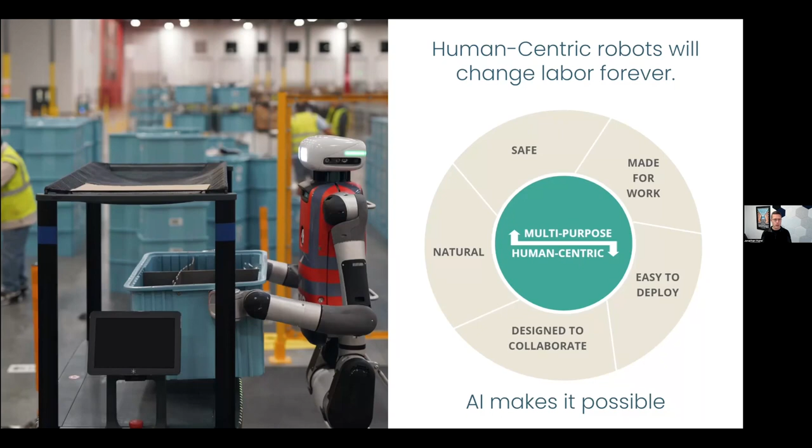Another point I'll make at the start of the talk is that we're really in a third revolution in robotics. The first one I'd identify starting in the 60s with the very first manufacturing robot, the very first robot that was commercially deployed. These were big robot arms bolted to the floor, doing pick and place—pick something up in its workspace, set it down, welding, painting, that kind of thing.

And that market continues to grow. That's great, but that started a long time ago. Then maybe in the 2000s, we started to see autonomous mobile robots.

Now there's things that are rolling around and doing things, but still the whole environment, the whole space is designed for the robots. You have to really modify your environment so that the robots can operate in the warehouse, in the location where these mobile robots operate. But now what's happening is we're able to have robots exist in our space. We're able to have robots that are human-centric.

And because so many tasks are designed and built around us, that is a huge opportunity for being multi-purpose. Now that these robots operate in our space and can do the workflows that many people can, and there's so many different tasks and workflows designed around people, Digit can be multi-purpose. That's pretty exciting, and that's part of this whole new era.

We still have very nice cameras for photography that specialty photographers use when you really need top image quality. But the vast majority of photos taken in the world are on a smartphone. And a smartphone, of course, is multi-purpose.

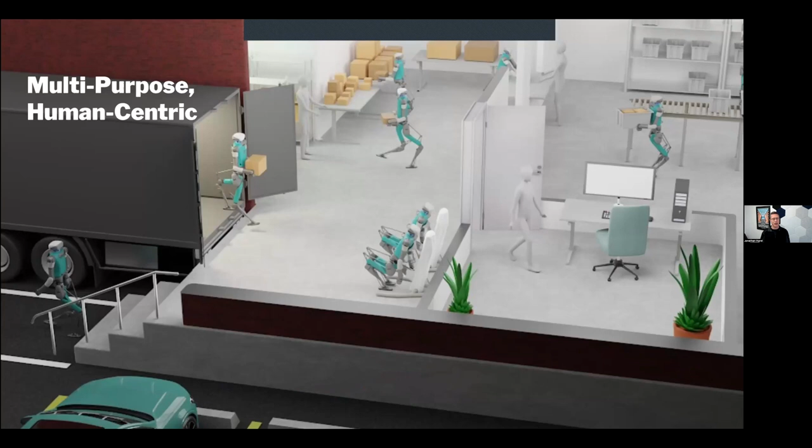Now, what we're talking about with robots is a machine where it's like the App Store, but for labor, but for doing the physical things in the world. And so having one robot that can do, say, unload a tractor trailer, like in this image, and then head down those stairs off to go deliver packages out of an autonomous vehicle, and then be sorting totes on those bins, and then also be interacting with a person.

This is in a human space, in a human environment. The robots can come in and just start to do all this stuff. That's when these start to become part of daily life, start to become very, very common, and really, really become useful.

So what does it take to get there? Okay, it's an exciting vision. We've wanted this for hundreds of years as humans.

First, I would say it starts with the hardware. The software is limited by the hardware. The hardware is the interface between the AI and the world. An AI is a brain in a box until you've got hardware that can actually physically interact with the world. And it isn't as easy as making something that looks like a person and putting motors on the joints. It's also moving like a person and getting true dexterity, which is really a holistic combination of the physical hardware and the software that's controlling it.

And then another thing that I think a lot of people, especially in academia, may overlook is the commercial engagement. It's an absolutely necessary piece of this in order to have a use case, an important, valuable application that has metrics and requirements to it.

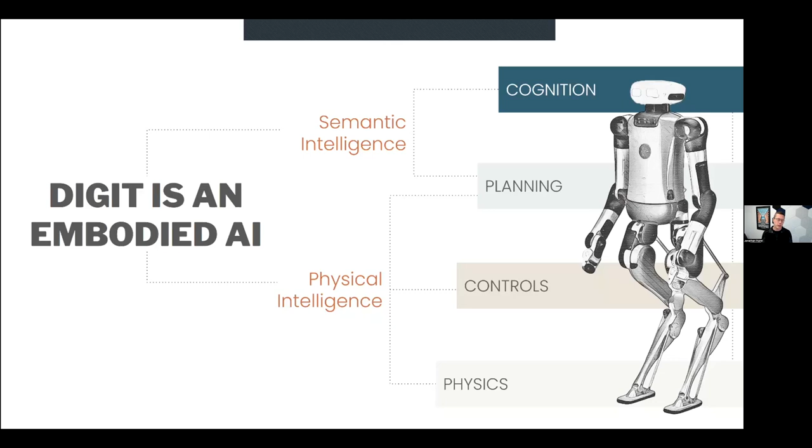And really, that's kind of like, what can the robot do? Can it handle stairs? Can it pick up a cup? Can it open a door? What kind of dexterity does it have? Can it go down a hallway? What can a robot do, as the physical intelligence?

But then on top of that is the semantic intelligence. That's what everybody's getting so excited about right now with large language models and chatbots and so on, is what should the robot do? And honestly, a couple of years ago, if you'd asked me, I would have said Agility is founding everything on the physical intelligence. It's going to take decades of having robots in the physical world to build up our semantic intelligence. But it turns out if you just scrape the internet for all of its information and put it in a giant large language model, you end up with that human context, kind of the instruction set.

So you can say, hey Digit, clean up this mess. I'll show you a video of that. And then Digit knows what to do and can break that down into a set of instructions that then the physical intelligence part of the stack can actually execute on.

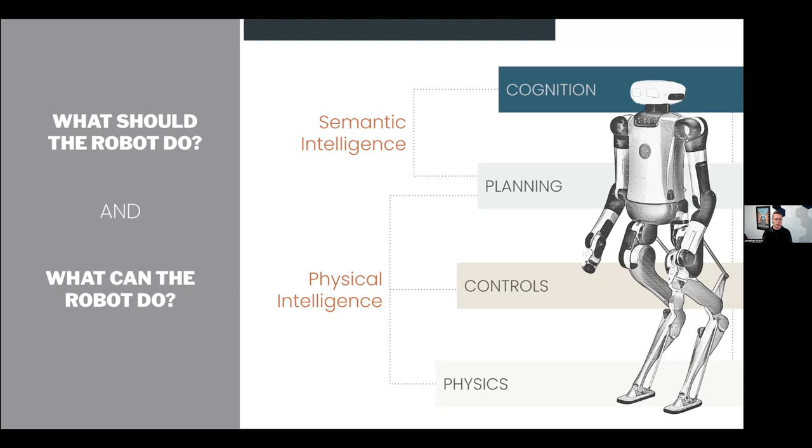Okay, so starting at the bottom of the stack, the physics. Physics really matter a lot. When we talk about locomotion, the thing we started with was understanding biomechanics. And I don't care about where individual muscles are, whether there's a knee joint, or the heel toe—the details of the morphology were not the thing that we really looked at.

We looked instead at what are the ground reaction forces. When the foot is on the ground, you can measure the forces on the ground. What's the center of mass motion? And then what is the basic behavior divorced from the implementation details of an animal? Because we're building machines. We don't have muscle and bone. We have aluminum and electric motors and computers.

So, first understand biomechanics. And this applies to manipulation as well, and studying how people grasp things. And I might make this point a few times, but the morphology or the shape of the machine is really just the tip of the iceberg. It's like one symptom, one small piece, and not even necessarily the most important piece.

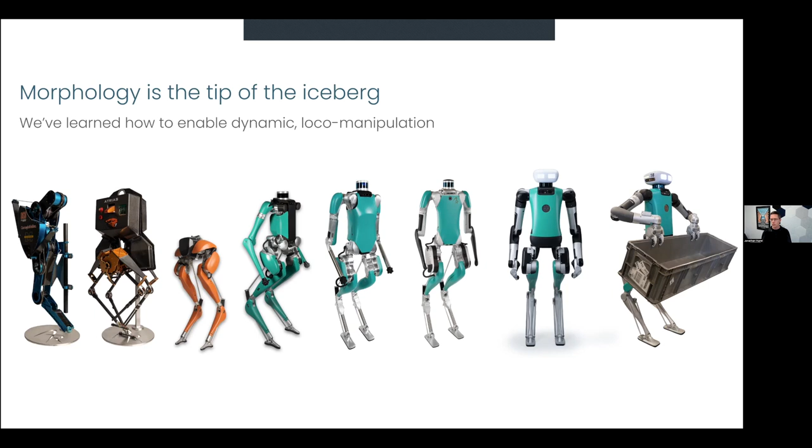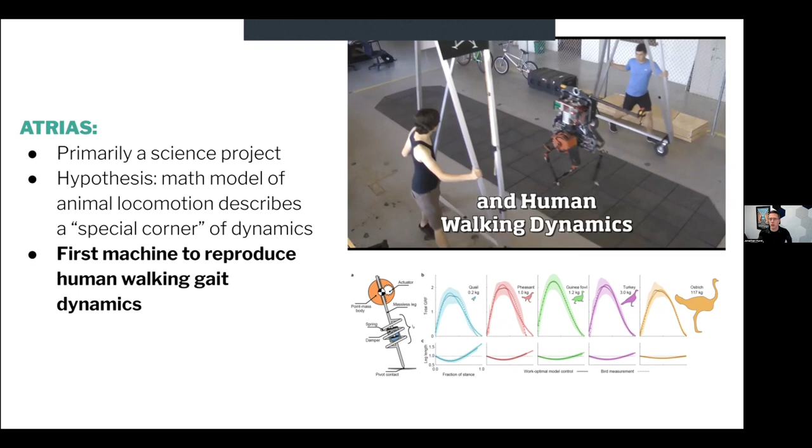So we wanted to make sure we aren't getting some nuance of a particular specific animal or specific bird. We wanted to understand what is true across all animals, all bipedal locomotion, and then make sure we captured that into a machine. And this hypothesis is that this math model that did represent how animals really describes this special corner of dynamics, this self-stable behavior of locomotion. And ATRIAS ultimately was the very first machine ever to reproduce the dynamics of a human walking gait.

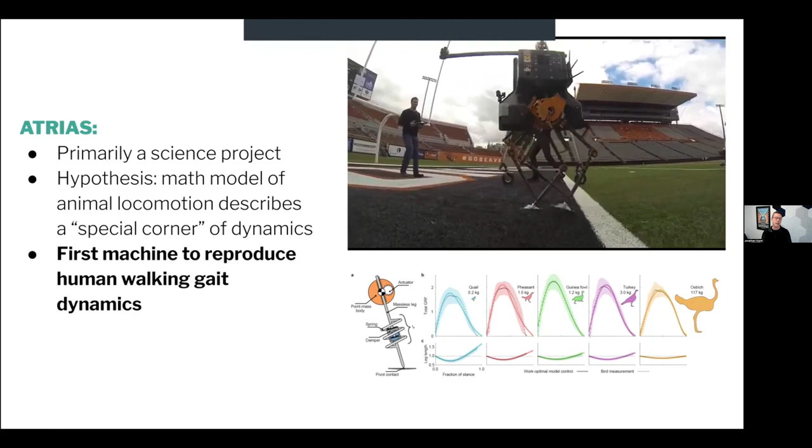A little bit into this video, you can see that. Here you can probably see that it's walking and running, and you can see, of course, the morphology, the shape of it is this 4-bar linkage, nothing like a person. But here, the walking dynamics—look at the ground reaction forces. On the left is the robot. Let me pause that there. On the left is the robot, and on the right was the person. And you can see they're awfully close.

So this is one symptom, one thing that shows us that we're capturing the right physics of locomotion. The other is, hey, it's walking and running outdoors over all kinds of terrain. It's totally blind. There's no planning. There's no camera. There's no perception. Yet we can go over all of this terrain. So there is this special corner, this self-stability that we're getting by capturing the right physics of locomotion.

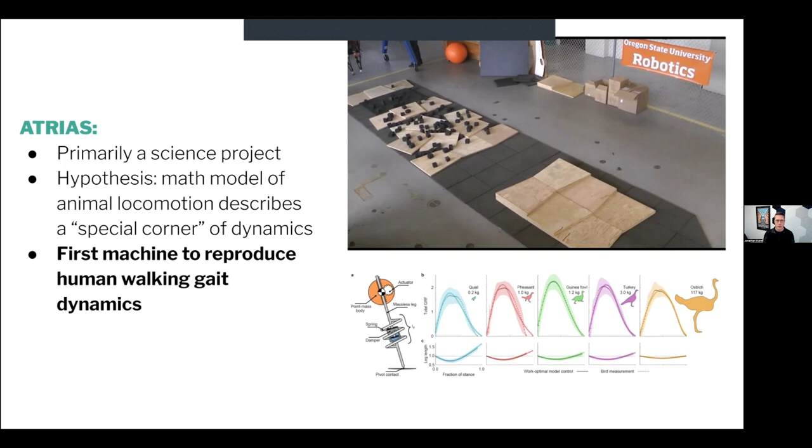Okay, so these are the foundations. And I want to point out, the hardware, the physical, mechanical pieces of the robot, they have to be special. You can't just put the motors on the joints. You see how this robot is moving organically. It's not moving robotically. This is not a position control trajectory. It is not a position trajectory.

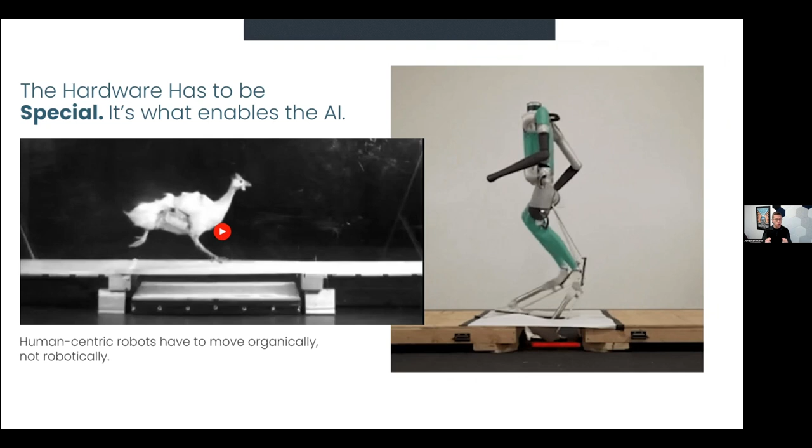It is much more about forces that we're applying on the world. And so we need special actuators that are actually controlling the force and able to control the force at a high rate. It's about impedance and compliance and flexibility when it makes unexpected contact with the world. They have to move organically, not robotically. Only if you have your hardware foundation and your physics integrated in that way can you hope to then learn how to do natural walking and running gaits. And again, this applies to locomotion or manipulation. I don't think there are that many differences between locomotion and manipulation. I think of it all as one kind of loco manipulation challenge.

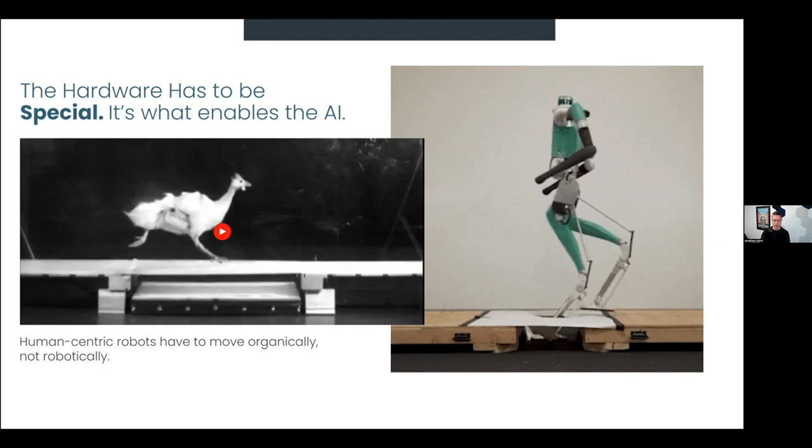So the hardware physics, when you're designing a robot, that's not something that you can learn. You can't have a computer just use a machine learning algorithm and spit out a design yet, maybe in 20 years or 100 years, sometime in the future. But today that's engineered. That's engineers who understand the physics and understand what they're trying to achieve, and can work with various vendors and manufacturing processes to create the machine that you want.

But then, kind of the next layer up, the controls, that can be heuristics and model predictive control and things where engineers are writing down the equation, the solution. And it can include learned approaches, reinforcement learning and other approaches. All of those things are really applicable in different ways for controls.

But one thing that's true is that all of this must be explored in simulation. So the physical intelligence of this is not something that can be data-driven. You'll see a lot of people talk about using teleoperation to control these things, and you learn from teleop in order to have a machine do useful things in the world. I don't believe that fundamentally can work.

I feel that you can sometimes, and we have seen examples and demonstrations of people, after teleoperating a humanoid robot, then the robot can reproduce that task, but it's extremely brittle. It is very, very brittle, and only in the very specific scenario within the constraints that the data was taken can it operate. It isn't generalizable. It isn't stable the way that we showed that locomotion over all kinds of terrains.

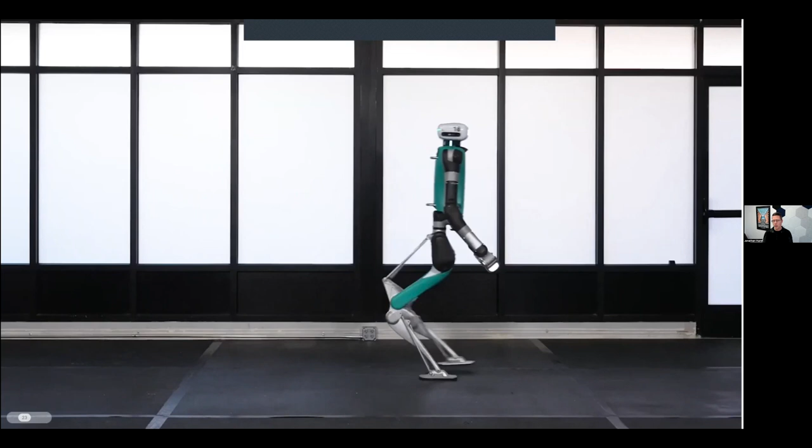And then we get to the sim to real transfer video. Here it is in simulation. And here it is on the robot doing the exact same behavior. Sim to real works if you've got the hardware, you understand the physics of your hardware, and it's clean enough that you can simulate it.

All right. So let's see.

Same video as before, but the point I want to make is that this success of going from simulation to real depends on having robust physical intelligence, because you can get brittle solutions in simulation. So in your simulation you have to have inaccuracies, noise, and all of the stochasticity you're likely to see in the real world if you want the robot to be robust to that as well.

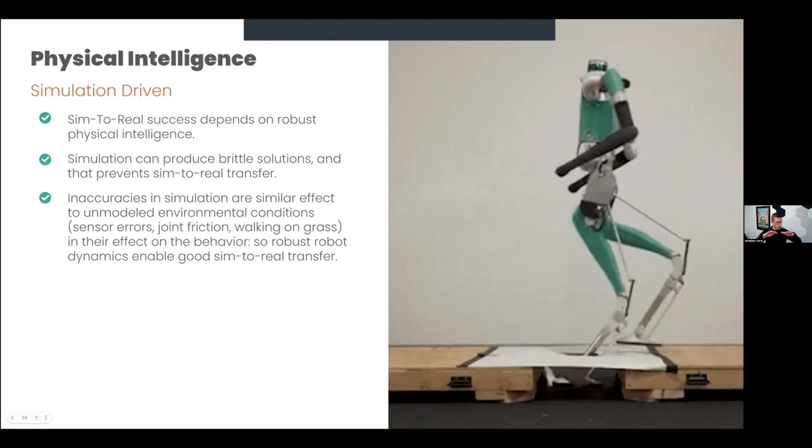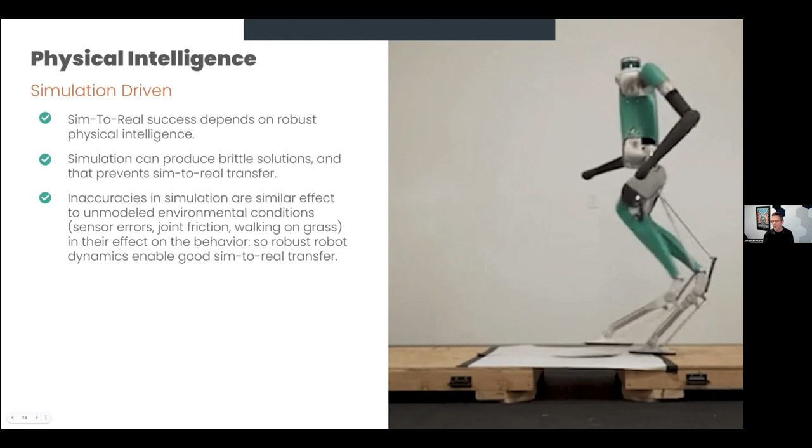A story to tell: when we first took Cassie, our bipedal robot, and had it run a 5K on a learned policy, it worked great on our treadmill in the lab. When we took it outside, a very slight sideways slant—the road had a slight crown so water can drain off, less than 1 degree—was enough to totally destabilize the robot. It would just fall off to one side or the other. We had to go back and spend another few months training on all kinds of different non-flat surfaces to get this thing to actually be robust outside.

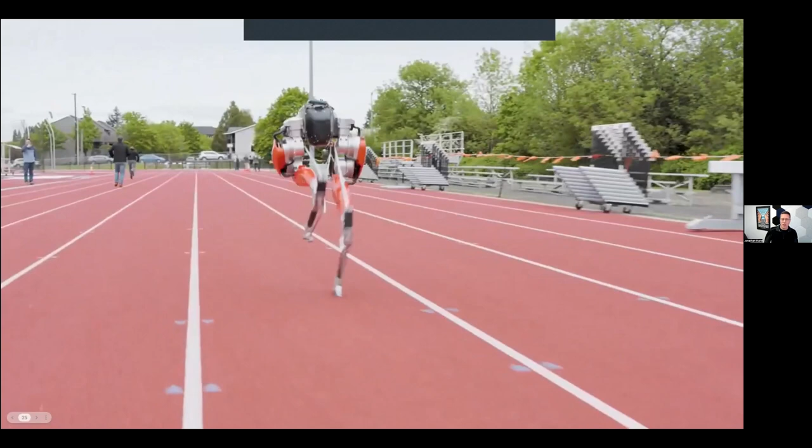And here it is. This is Cassie now running a 100-meter dash, all using reinforcement learning to create this behavior. First off, the robot has to be capable of impacting the ground over and over with compliant, impedance control. But exploring this behavior in a learning environment and simulation is the only way to get such a beautifully natural gait. This is not constrained by some oversimplified model.

This is not a linear inverted pendulum model. This is not zero moment point. This is bouncing along—very much spring mass locomotion, but with crazy inertial distribution in the legs that make it a real bear to try to control using any other method. So I'm very excited about these kinds of approaches.

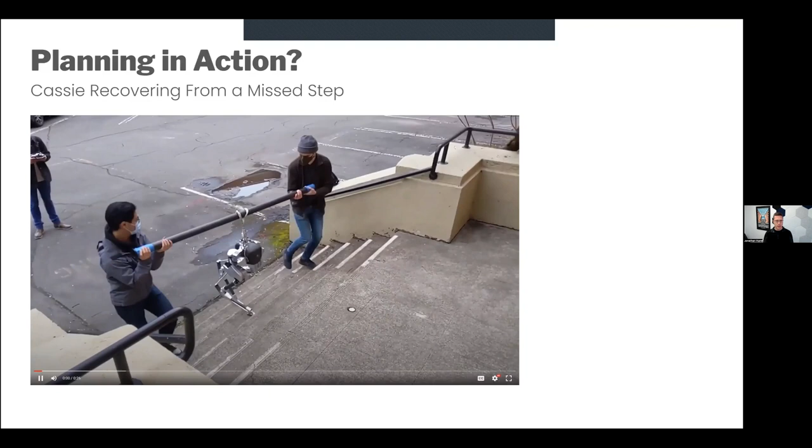All right, here too—this isn't brand new. You can see Cassie steps right on the edge of the stair and is able to recover. Here it is in slow motion: you can see its toe is caught right on the very front edge of the stair, and yet it steps backward and forward. That's because this is the stair climbing policy.

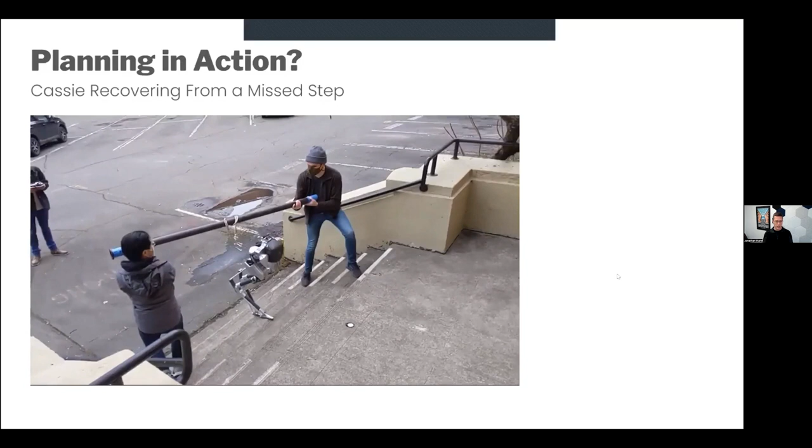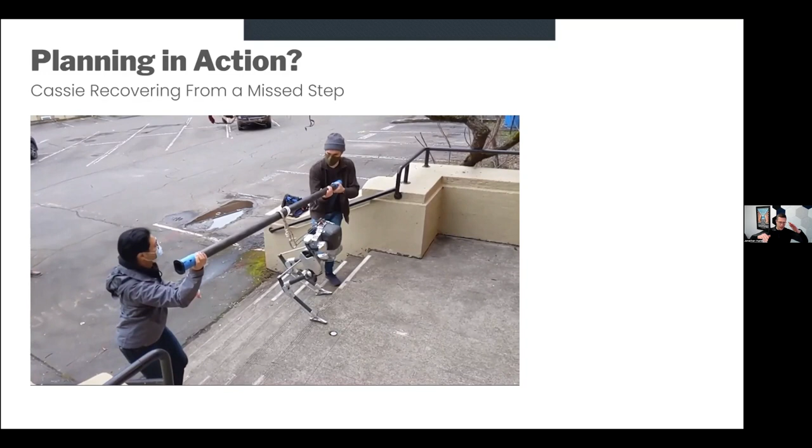It saw tens of thousands of stairs in simulation. So even with no cameras, it's able to create a gait where it's stepping high, and it will be able to recover even if it steps on something it doesn't expect. Step up, step down—it doesn't need to know.

Now, if you add some perception to that, you get stronger behavior. So this is Cassie—it does have a camera on the front of it, and it's creating a depth map of its environment, so it's able to interpret something.

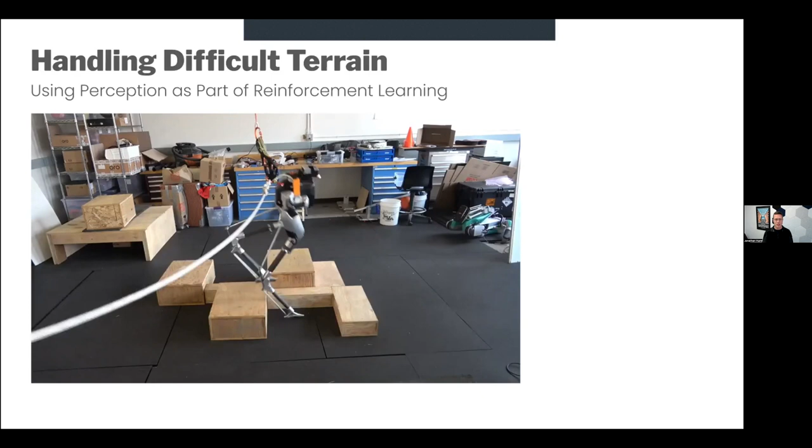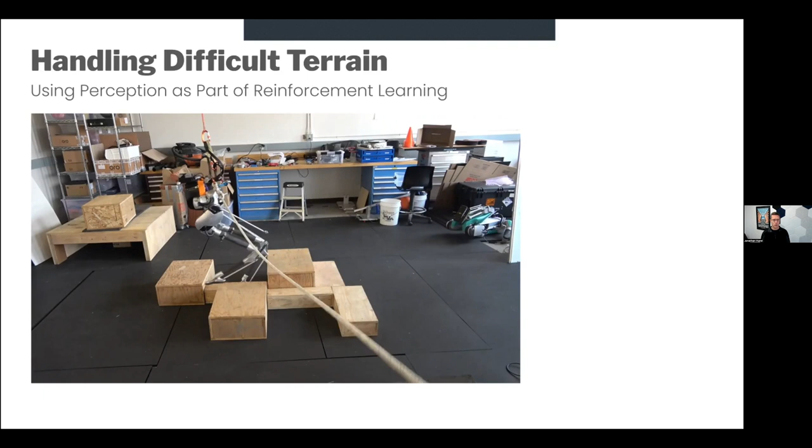That depth map, of course, is kind of noisy, so it's important to have the robustness you saw before, with locomotion that's completely blind as a backup. But you can also see it taking small steps on flat ground, and it sees when something is coming up and steps up pretty high. Sometimes it misses the step—it steps high before the step comes, or steps off the edge of something unexpectedly. Just like a person, it can be a surprise, but the robot can handle it. That's the benefit of having this hierarchy of layers: a robust gait that works while blind, then adding information with perception on board.

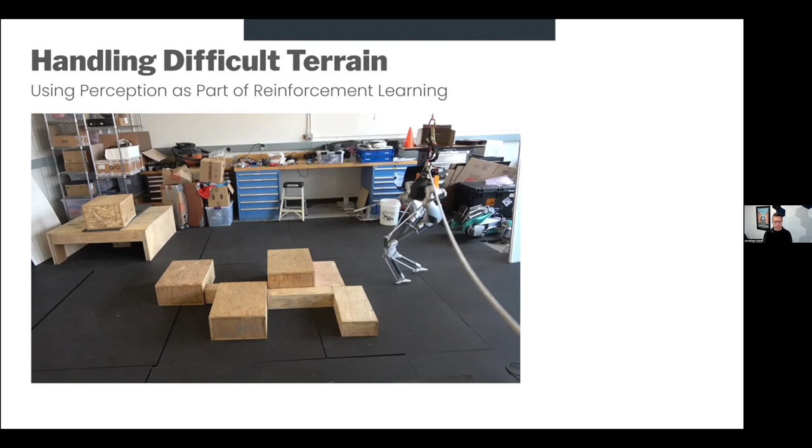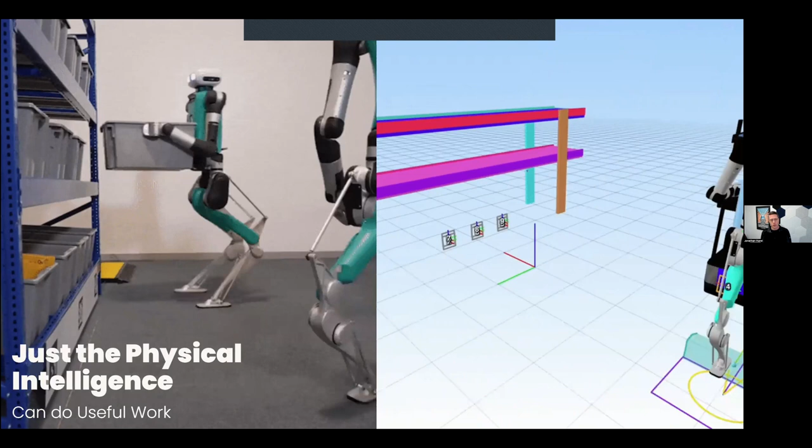And then there are QR codes—you can see them down in the lower left of the video—that help the robot's perception system localize itself within the frame. On the right side, you see the little squares labeled 7, 8, 9; those are the QR codes, the thing the robot can actually see. Everything else is something humans drew in the CAD model that should correspond exactly with what is in the real world.

And then the robot is basically just operating within its own internal CAD model, which happens to correspond with the real world. So there's not a lot of sophisticated perception going on here. There's basic autonomy and basic planning happening, but not a lot of intelligence or major decision-making. This is just physical intelligence. And you can still do really useful stuff just with that. That's part of the foundation of our initial deployments.

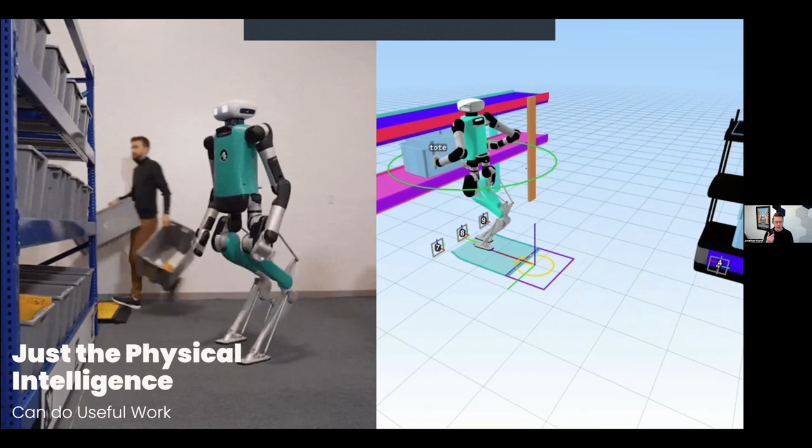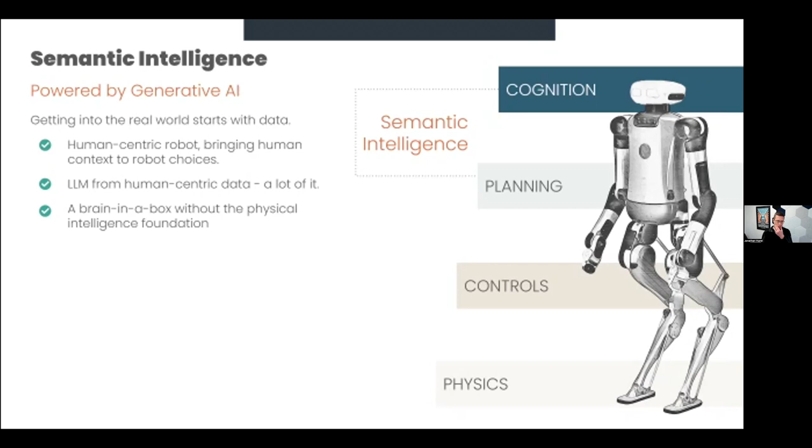However, if you actually want to do useful things more broadly, in a more versatile way in the world, you need this semantic intelligence. You need the human context, so the robot will be able to decide what to do in an environment that is uncertain and has a lot of human artifacts. How would you learn what a cup is or a chair from simulation? You simply can't. You have to pull that in as a data-driven approach. And that's what generative AI is doing, pulling in data to build a model the robot can learn from. Of course, it's a brain in a box without the physical intelligence, but it really unlocks the versatility and variety of things the robot can do. And that's going to be completely necessary when a robot is operating in human spaces.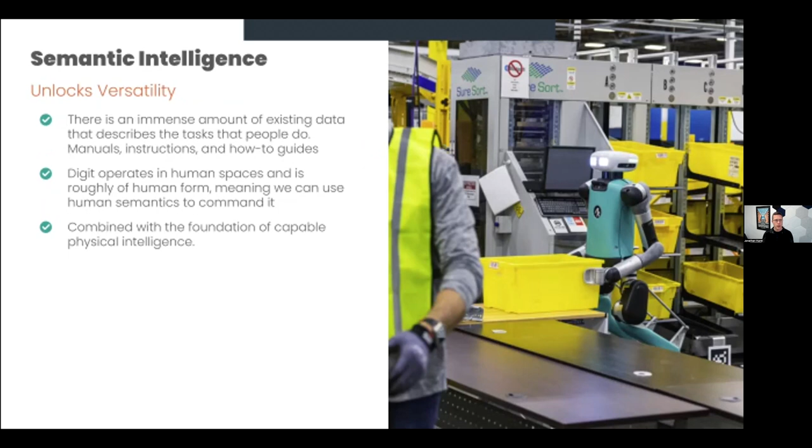So in our initial demos, we've shown what's called a chain of thought LLM prompting approach, which gives the whole continuous ongoing set of things the robot is going to do. And that allows it, if something about the environment changes, it's not a fixed plan — the robot can change its plan on the fly, basically change its mind, given new information.

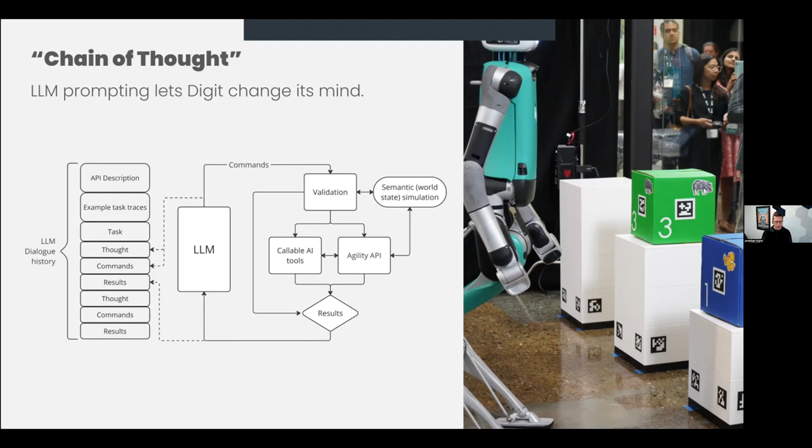And I'll show a quick video here. Okay, so the prompt at the beginning of this, you can see there's some bubble wrap there, there's a cardboard box, there's a plastic jug, and there's three bins labeled paper, plastic, trash. And the command to Digit was verbal: 'Digit, clean up this mess.'

And so it's entirely up to the LLM, which is data pulled off the internet, to have the human context to understand what is a mess and what is cleanup, and interpret what one does to clean something up. In fact, you saw here at the beginning, the bubble wrap that Digit picked up off the ground — it chose to put in the trash bin and not the plastic bin, because Digit knows from the context of the internet, I guess, that bubble wrap is not recyclable and should not go in plastic recycling. It should go in the trash. That's not something we programmed. That's something an LLM just enables us to do when we connect it up to the physical intelligence, and it can just give direction.

So the LLM here is directly programming the API of the robot. In other words, Digit can do these things physically. We could have had an engineer write out the list of tasks the robot should do and in what order. But instead, we just told the LLM, what is your interface? What is the programming language for the actions Digit can take? And translate the command from the person into the programming language for Digit. And that's what it was able to do.

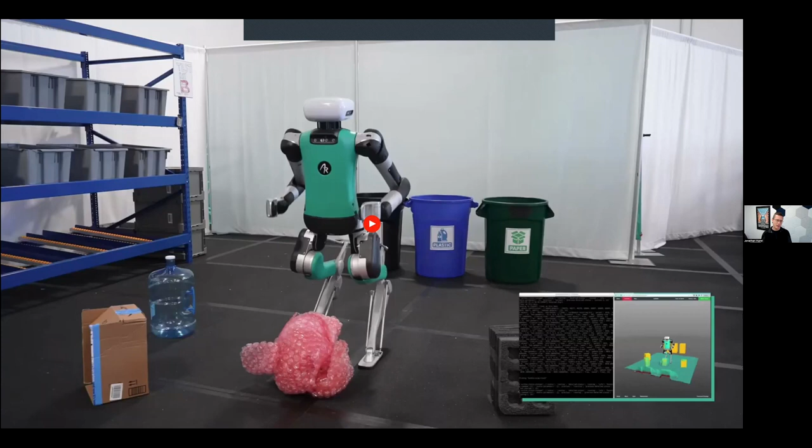And this only took about two weeks from start to finish to implement, which really illustrates the power of these new tools. Pretty exciting. And by the way, these tools are like a commodity now. There's any number of different companies creating these highly intelligent chatbots that you can interface with, and it's very inexpensive to use. So something that was next to impossible 10 years ago is practically free now, which is just amazing. We're just going to have to watch all the applications they're used for.

So here's another recent one. The command here is kind of a joke — there's a video a while back with the CEO of NVIDIA, Jensen Huang, saying, 'Hey, what's cooking?' And he pulled a couple of GPUs out of his oven to show what NVIDIA is up to. And we were there visiting NVIDIA recently, and we asked Digit, 'Hey Digit, what's cooking?'

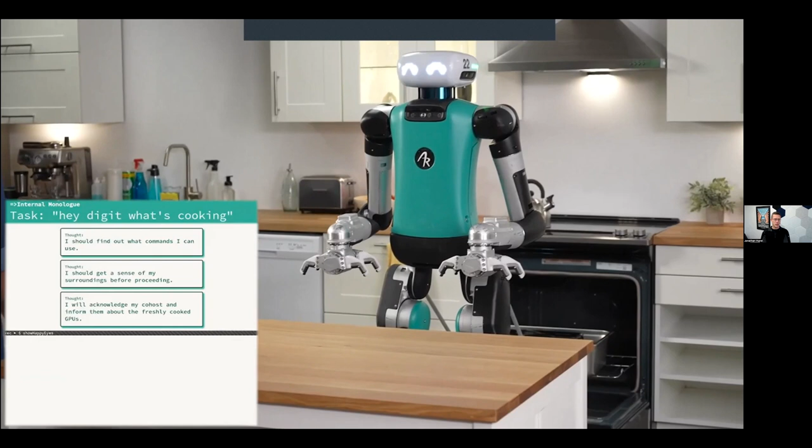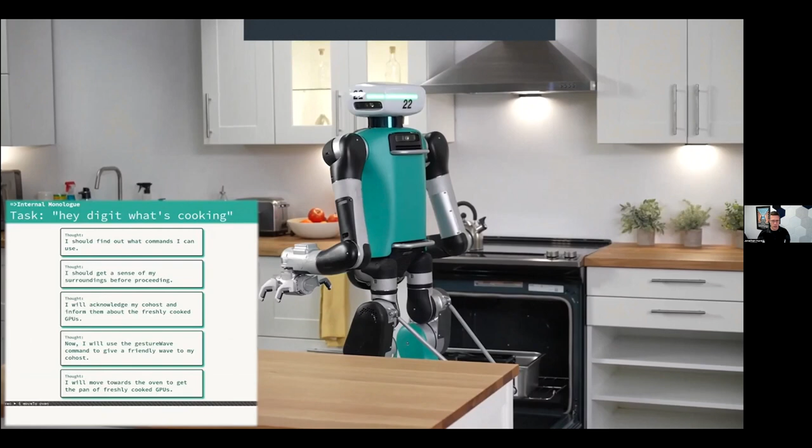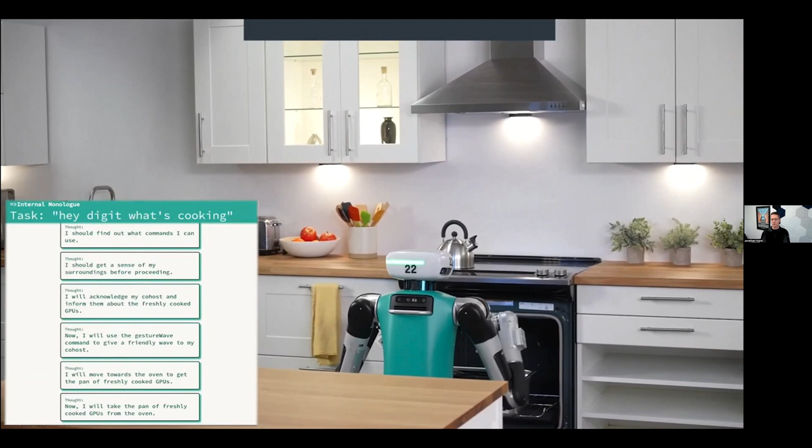And you can kind of see here in this video what Digit's thinking, saying: I should find out what commands I can use. I should get a sense of my surroundings. I will acknowledge my co-host and wave, and then say, 'Hey, there's some GPUs that are cooking.' Now I'll use my wave command, and I will go to the oven. You can see the chain of thought, the different tasks coming forward from one to the next. And then Digit's picking it up and going to bring it out. So we did this for Jensen Huang, and it was great.

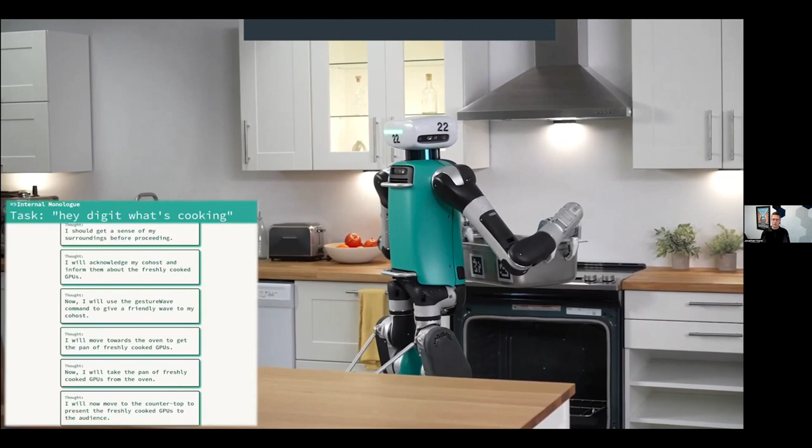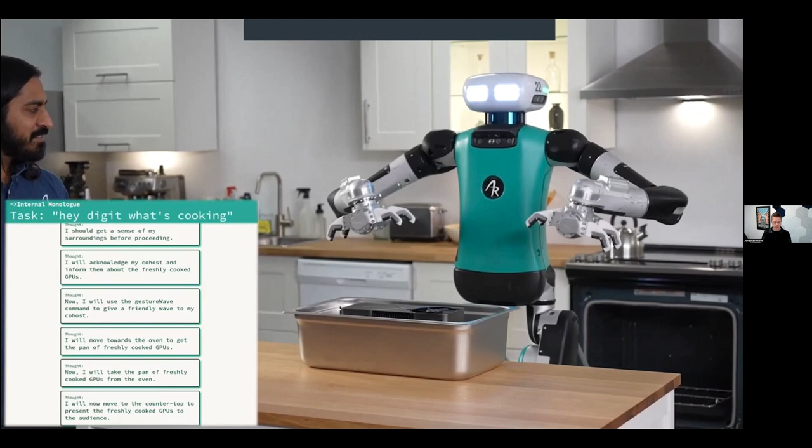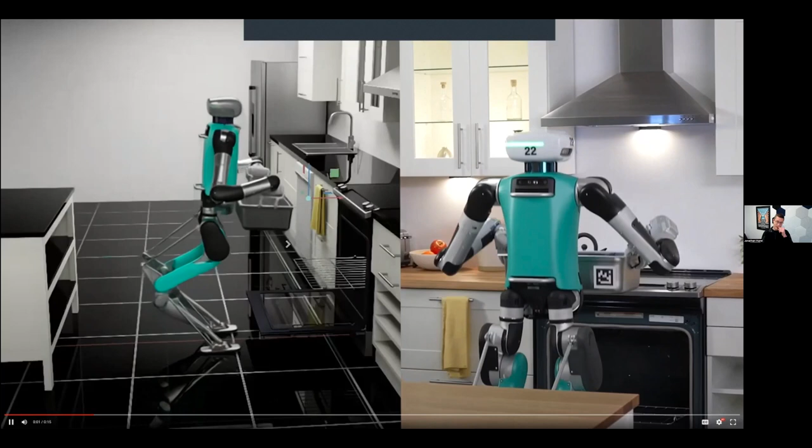Here it is, by the way, in simulation. This is using Isaac Sim on the left, and then the Digit robot on the right. So it's good to have a way to simulate things and have some kind of a digital twin.

I know you all know this because we're a lot of roboticists in the room, but AI is really a big deal right now. It's going to change the world. It already is, but it's completely enabled by the hardware. You have to have the physical intelligence as a foundation to be able to do the physical things in the world. Having an LLM at the top is great for this cognition. That is sort of interchangeable with, in our case, applications engineers who set up a workflow.

Now you can have an LLM kind of lay out the workflow and tell the robot what to do. But the planning, the controls, the physics, that's more like reinforcement learning, broader machine learning approaches, and a bunch of novel hardware design. We're really working on actuator designs to make them transparent and be able to impact the ground and not be so rigid like a robot, which is a hard thing to do.

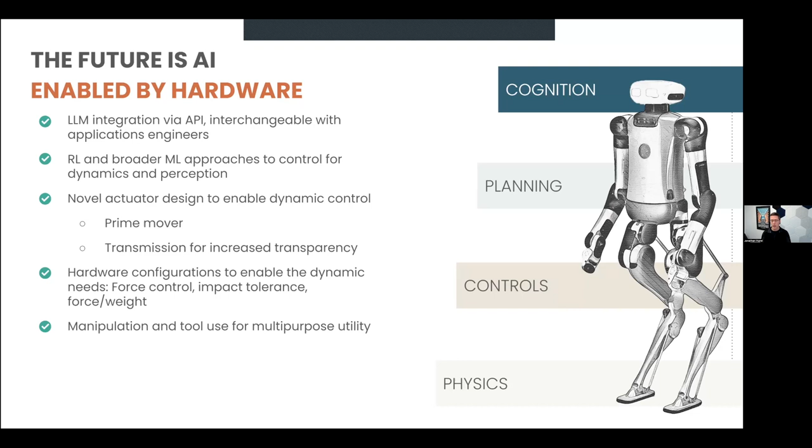And of course, manipulation is one of the grand challenges in robotics. Having manipulators that are going to be anywhere near as dexterous as a human hand, same problem. Hardware enabling AI. I think a lot more is possible now than it was 10 years ago, but we've got a lot of work to do. And boy, what an exciting time to be working on this stuff.

So I kind of see, as I'm getting close to the end of my talk here, I'll have a few minutes for questions at the end. We're kind of on these eras of progress with these human-centric robots.

Our conviction is that you can't just start by saying we're going to build a general purpose robot and embodied artificial intelligence that will help us around the house. That's certainly the goal we all want to get to. But our conviction is that the fastest path to do that is to start first with one of these multi-purpose robots, where your vision is multi-purpose, doing one thing, even one thing reasonably well. And I call that era one, just one or a few of these multi-purpose robots, just doing a single job pretty well.

Then era two is growing out to hundreds and thousands of these robots that can do something. And again, that requires commercial engagement, that requires the metrics of showing that you are meeting requirements for a company and solving a problem for somebody that they're willing to pay for. That is the only way you get to era two, proof of scale.

Then era three is when you start to say, do your second task really well, your third task really well, and you have the single robot that does one primary job and then starts to be able to do 2, 3, 4, and you're starting to get into that app store, but for labor. And that really becomes, we start to really enter this revolution in robotics that are in human spaces and human environments.

While we're doing that, we're learning the safety, we're learning the reliability, we're learning the decosting. And we then can get to era four, where you end up with businesses, they can just buy a robot and then just teach the robot how to do what it does. And then it's working in grocery stores and hospitals and other places.

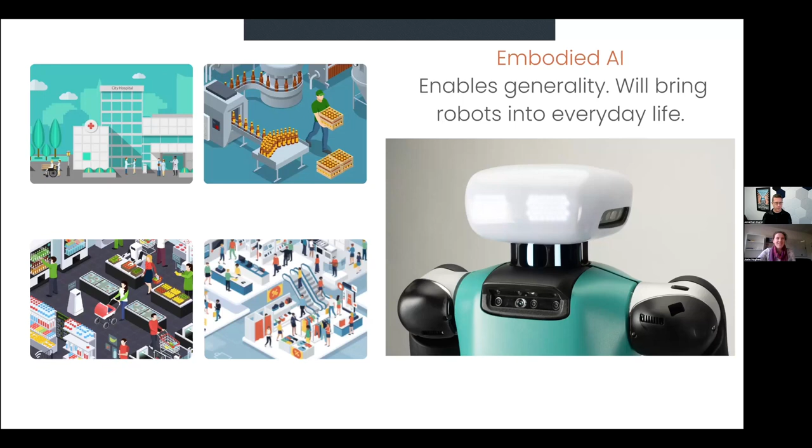Thank you so much, Jonathan, for a really inspiring and exciting talk. Thank you so much.

I have a few questions, but maybe just to start us off, for me it's an interesting question of saying legs were used 25 years ago. What were the tipping points, hardware or software related, that have taken you to where you are now?

Legs were used 25 years ago, but think about this comparison. I talked about how the morphology is just the tip of the iceberg. We did have robots that could pick up one foot and place one foot in front of the other, but that's different from having robots that can truly coexist with people and go where people go.

If you take a humanoid that we're all familiar with, many that have been built, and you imagine lifting it up off the ground by maybe half a meter and then drop it, what happens? No matter what software you've written, when it hits the ground it's going to hit like a ton of bricks. It's going to break things in the leg. It's going to land in a very rigid robotic way and not at all absorb impact the way that a person would. Now, there's just a few people and a few groups, Boston Dynamics and Marc Raibert early on, that had these highly dynamic robots, but most machines are not like that.

We were very much in that same camp of understanding animals and biomechanics, and a lot more dynamic, the way that you saw some of the Boston Dynamics machines. Atlas was dramatically different from almost all other legged robots, just to focus on those physics and those dynamics.